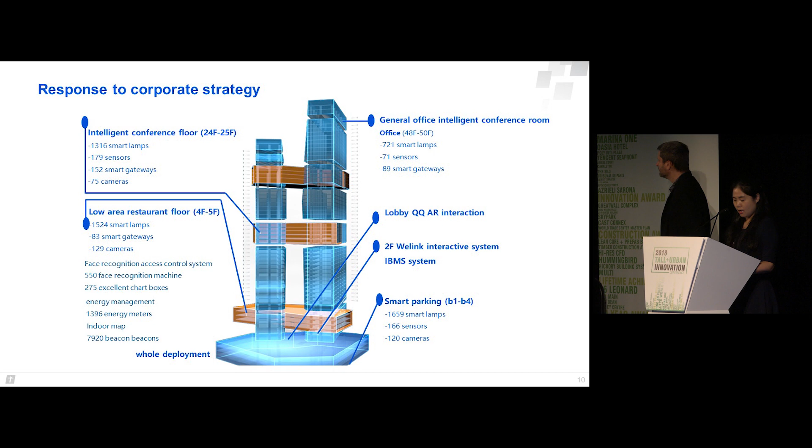At the same time, we set up a WeLink intelligence platform, which integrates all intelligent systems into one platform. This platform realizes the connection between people and things in the building, and carries on information exchange and communication between them, reflecting the strategy of connecting everything.

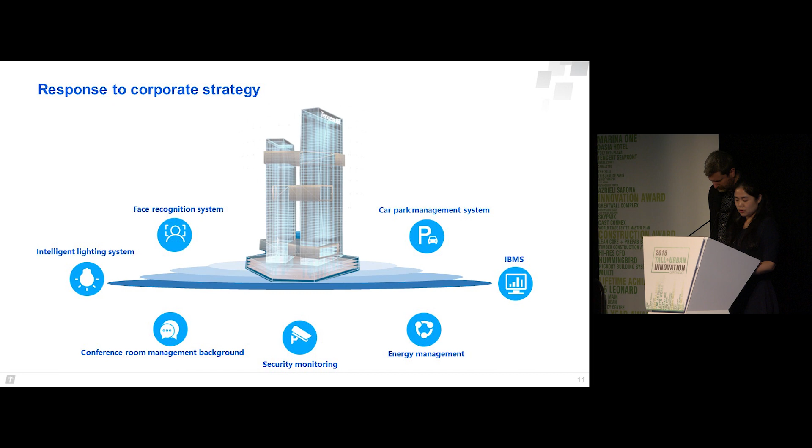On this platform, there are our company's major business lines of internet products, including QQ from SNG, YouTu face recognition technology, QQ TV, WeChat intelligence, MIG indoor precise positioning technology, QK certification, TEG security platform, and so on. The Seafront Tower provides a suitable application scenario for the company's products and has become the largest testing ground for our company's internet products.

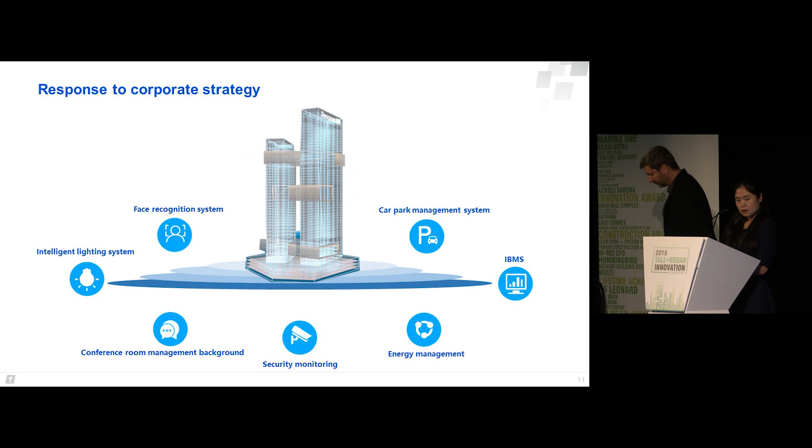Seafront Tower was produced in this context with the cultural characteristics of Tencent, with the logic of internet products, respect for users, respect for energy conservation and environmental protection, reflecting the progress of technology.

As you know, we have more than 39,000 staff when Seafront Tower was completed. We need more office space, and we will have lots of other projects under construction and to be built. These thoughts and visions will also be implemented in future projects.

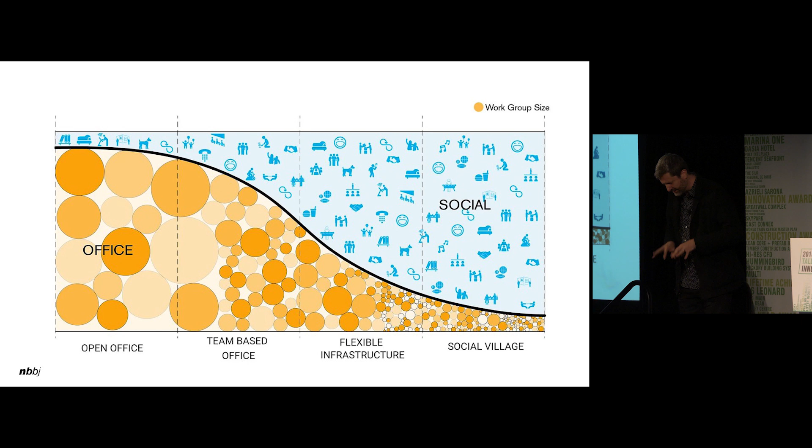This paradigm shift is at the base of all of this, thinking about connectivity. Jiang Ling talked about connectivity, connecting people, and we started very early on thinking about how to create a building that really truly connects people, which most tall buildings don't do a very good job at. We thought about where office and workplace is going. It's becoming much more social, less about people sitting in seats, typing and coding away. It's about getting people to connect and interact and create real meaningful innovation.

It's amazing to me how many companies still work on the left paradigm, which is head-scratching, while many of the more innovative companies are going more towards the right, which is a social, interactive, community-based work environment. So if we can create a building that actually does that, and explode typical building typologies to create that sort of interaction...

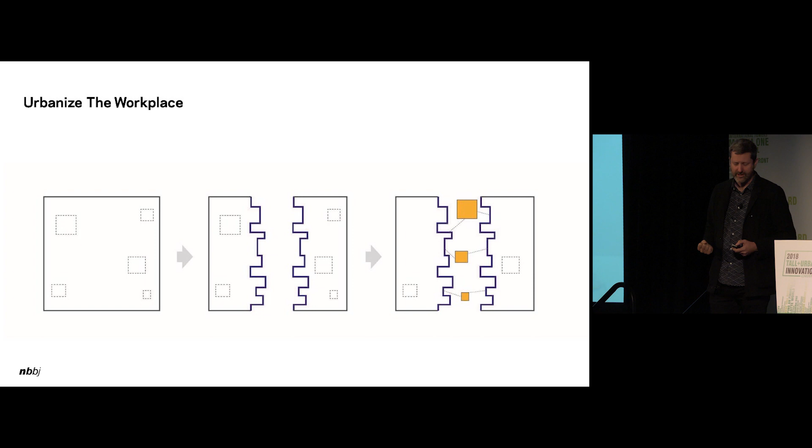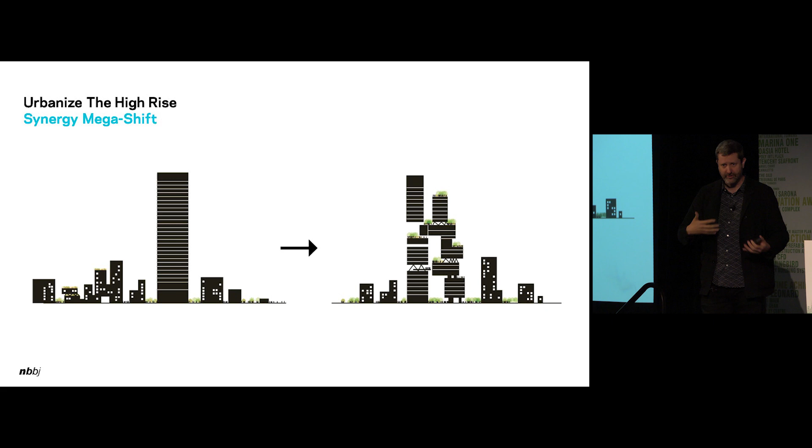Because the high-rise building is the prime culprit of non-interactive space, where nobody can see each other, nobody can connect with each other. That's a challenge everybody in this room faces: how to actually get people to interact and talk to one another. For a creative company like Tencent, to allow them to get the best out of their people, we have to explode these paradigms and move from the very pure economic form—a lot of people talk today about economics and economic-driven forms—to something more community-based, more green, more about people.

So that was really the underlying kind of thinking about this particular project.

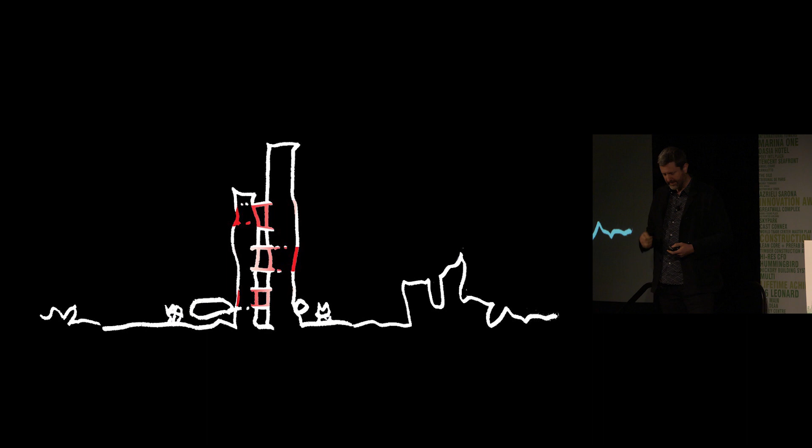So if we go deeper into it, we spent a lot of time, before we did anything, before we created this sketch, before we created the actual building, trying to understand what Tencent was all about. The building was really truly designed from the inside out, trying to understand their culture. Jiang Ling talked a lot about building the project from culture. So we spent many months in their offices, trying to understand what they're trying to do, where they're coming from, where they're going.

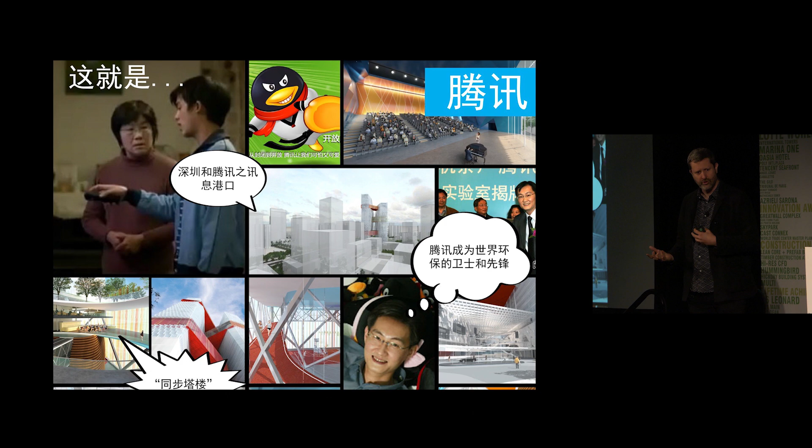And the sort of spirit, the character, the humor, the connectivity, bringing people together—what that all means, and capturing that somehow.

At the same time, understanding what their business is, which is one of the world's largest internet connectors. This talks about the cloud—it's the people that make that happen. It's bringing the people in the world together, and that became a very big inspiration.

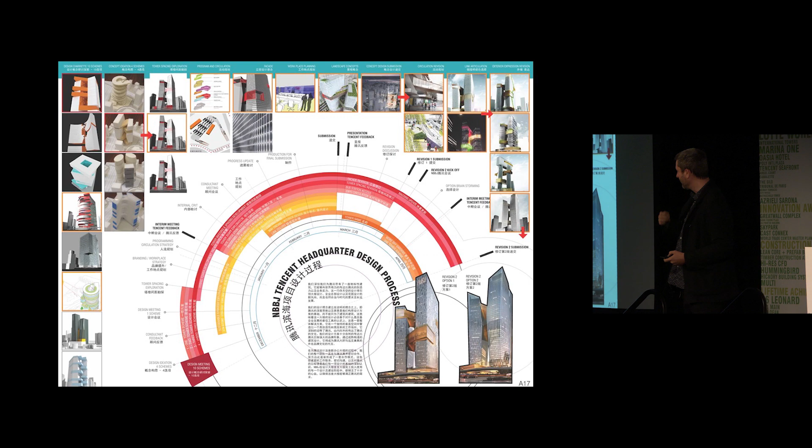We went through a very aggressive competition phase, with 2 phases, where we finally won the project ending up with this particular scheme, and I'll explain to you what this is all about.

But we started very early on—we had a sociologist on our team looking at what they're all about, how they work internally, and how they're then perceived in the marketplace, and how those connect.

And what we found oftentimes, it's kind of the same—it's the same people working there, same people using the product. That's expanded a lot in the past 9 years, but this is where we were at the beginning.

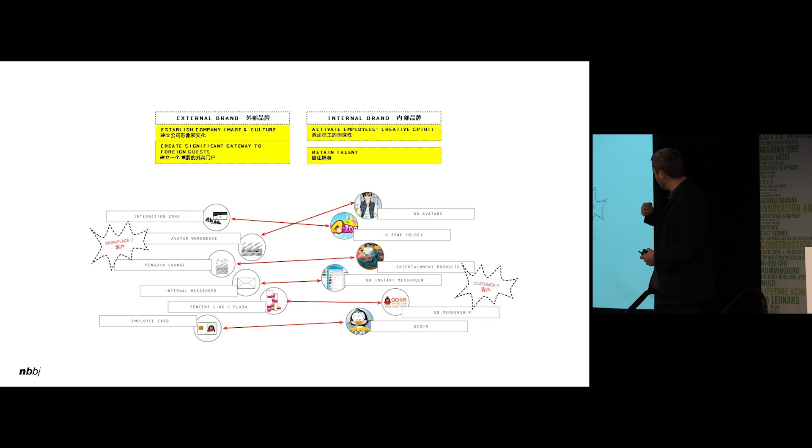So we started to look at creating spaces around understanding the product, understanding connection of people, and moving from there. That led to the idea that we could build the building on the left, which would be easy—a big giant tower with super efficient floor plates and everything at the bottom, avoiding lifting and egress issues. Really simple.

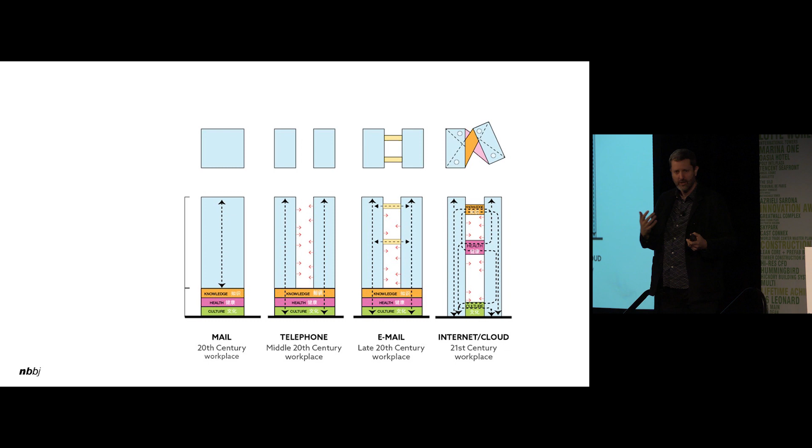But then if we pull it apart, suddenly you can see each other, and that's a really important thing. It was mentioned in the last presentation, the importance of actually visually connecting people in a tower. If we link it together, that's nice, so you have some way to move across. But we found often just a bridge link isn't very meaningful—nobody really uses it.

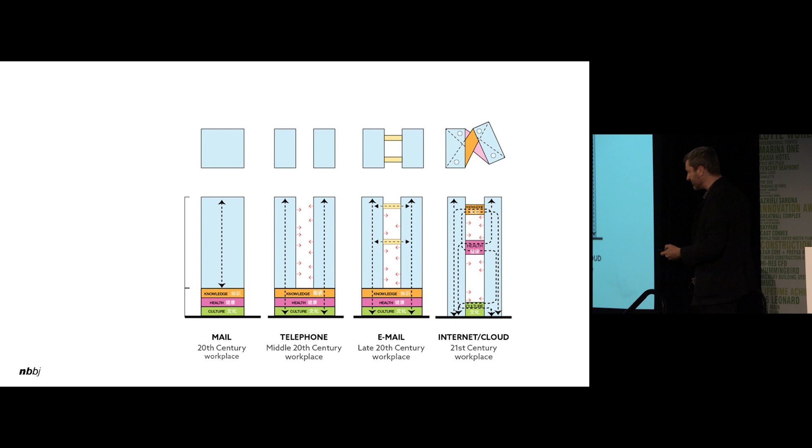So we took all the program from the podium and moved it up into the towers to create real meaningful connections between those towers. And that resulted in this idea of the vertical campus.

And I remember when we first went out to the site in Nanshan in Shenzhen—Shenzhen is the melting pot of China, an amazing city. They talked a lot about, wow, we would love to have a campus.

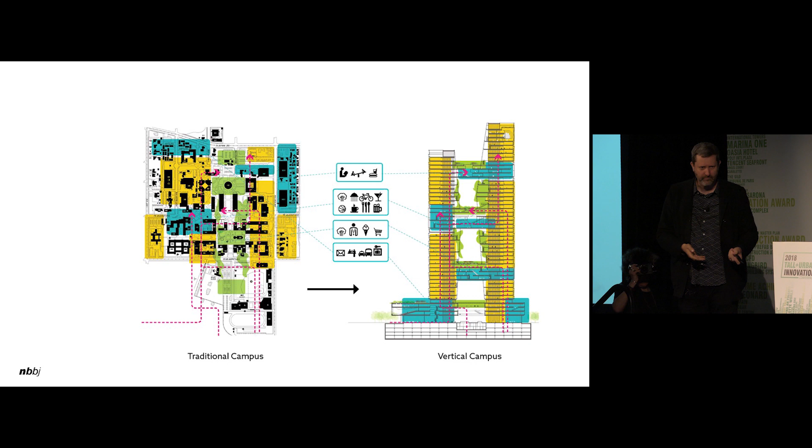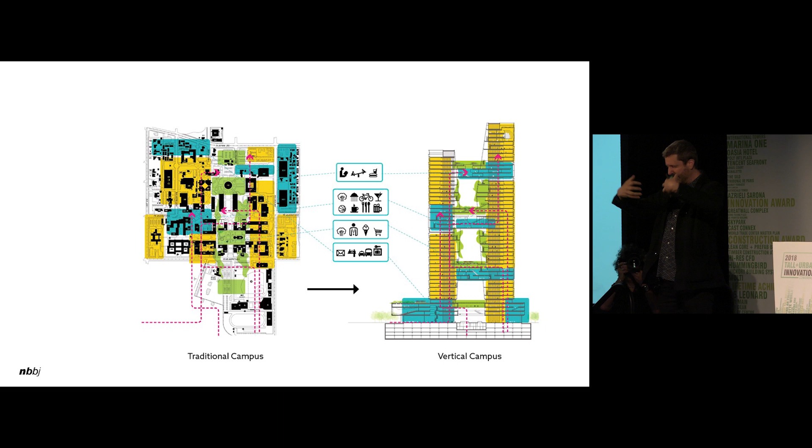Building a big sprawling campus in Shenzhen with the land prices there, of course, would be impossible with those costs, at least in this part of Nanshan, right by the university. So as we went through the process of understanding their culture, we ended up with this idea of the vertical campus, where we can explode the building typology to get something very marvelous and wonderful to happen inside the building.

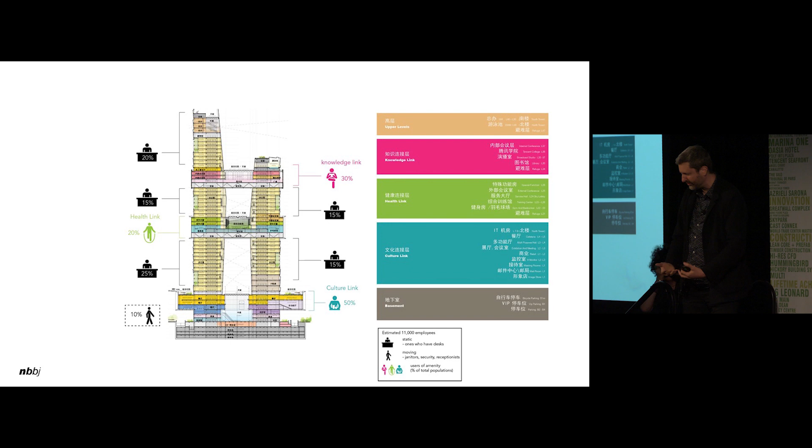And then the final location of pieces led to this thinking about these links. So the two towers, we split them into two towers so you can see each other. We've created three links, and they're all very meaningful. The bottom is a culture link, and that has a program which is semi-public, semi-private.

So there's things where you bring the public in, you bring them out, and you're linking the two towers together. We then created a health link in the heart of the building. The heart of the building is the health of your employees. So there's a basketball court, a running track that connects the two towers, there's food, nourishment, and meeting and connection spaces.

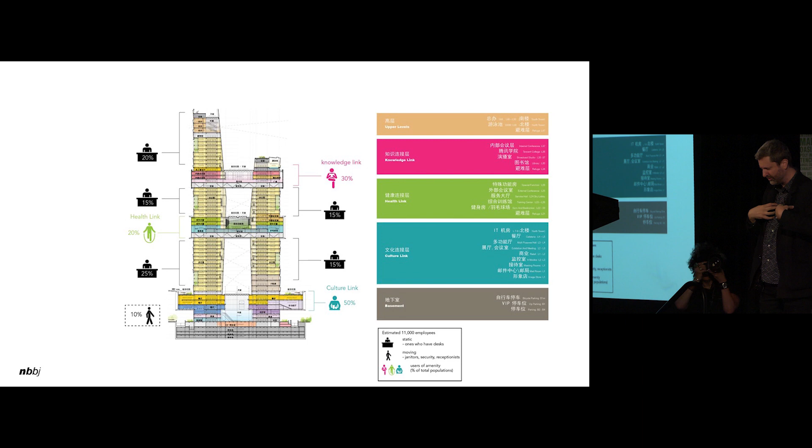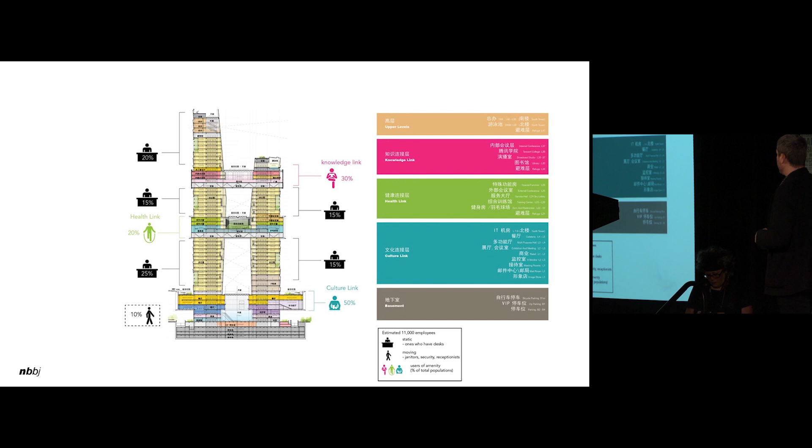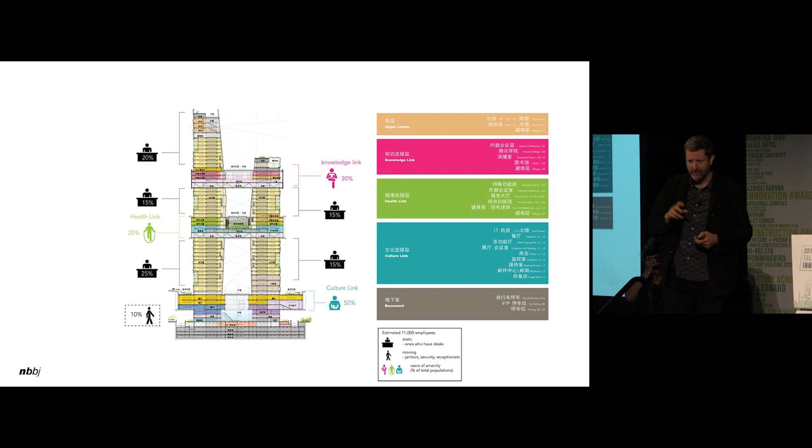And then the top is the knowledge link, which is the brain, where we have Tencent University, conferencing centers, and all those sorts of things. And that, in essence, creates this overall campus. We spent a lot of time trying to bring those nodes together so that those are, in a way, forced connection points, so people are forced to cross paths in those areas.

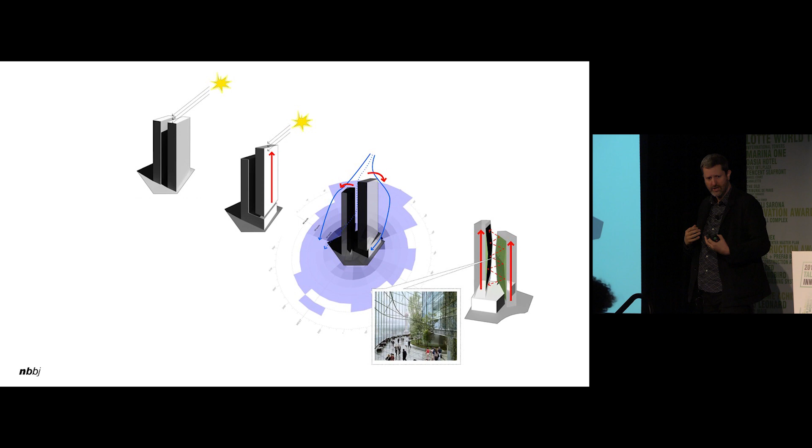At the same time, in splitting the towers, we very consciously lifted up the south tower, and made it quite a bit broader than the north tower for the simple effect of shading the north tower. So really doing very simple things with the massing to allow it to do more than just one thing, and allow the form of the building to come out from the inside of those links in that vertical campus.

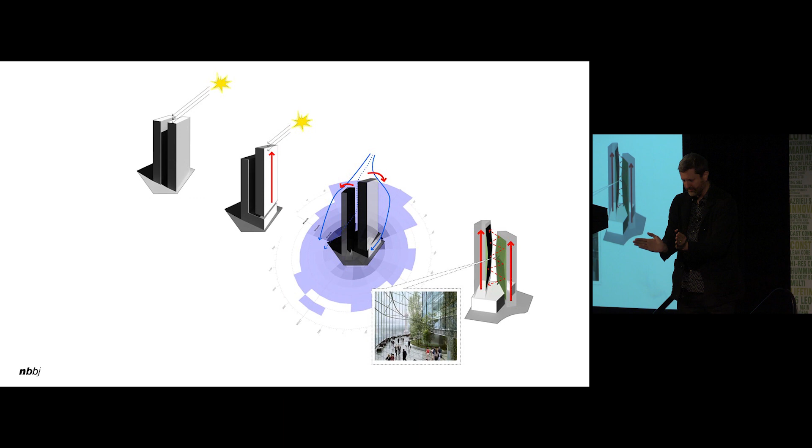And from the idea of shading in this very hot climate of Shenzhen, we then split it open to capture the prevailing winds and funnel them into the building in the center. You can see a quick site plan of how that cracks open on the site.

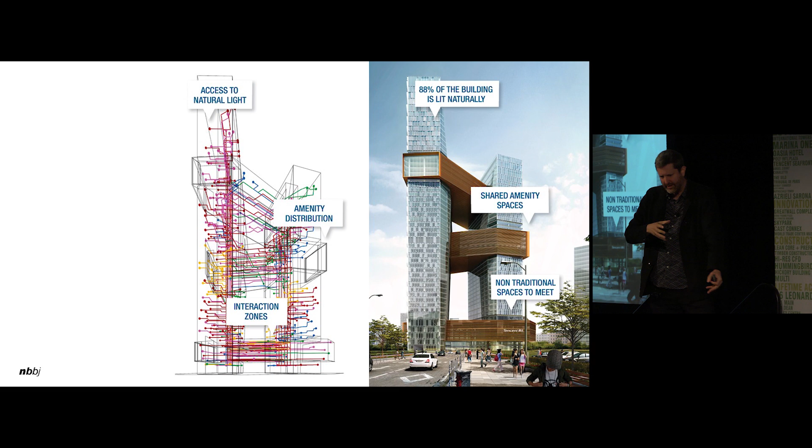We spent a lot of time working with Arup on the vertical transportation to figure out how we can get those links to be activated. So you have to go to them, you cross paths, you're going to grab a juice, you're going to go down, you're going to go up, and those become true centers and quads of the vertical campus.

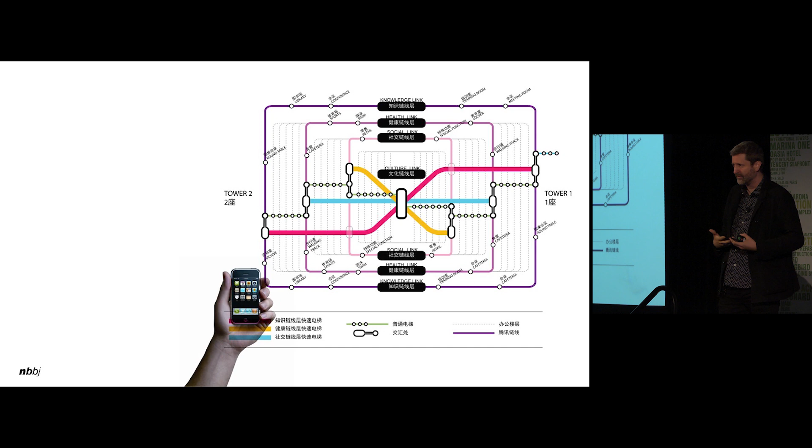And thinking about it like a transportation system—what's the transportation system for the high-rise of the future? What's the transportation for Tencent's headquarters was a lot of the conversation that we went through to get the right kind of movement flow to activate the building.

And it's interesting that it expresses itself in a way that's very strong, but it's also very connected in a way. It's very strong, but it's also very different. It's been broken open from the typology of the closed tower, suddenly broken open. It's embracing, it's welcoming. So it's, I think, a really important character that we tried to capture.

And we tried to create a softness to the building, even though it has these very strong forms and this strong character of connectivity, the skin itself becomes almost cloud-like as you go around it.

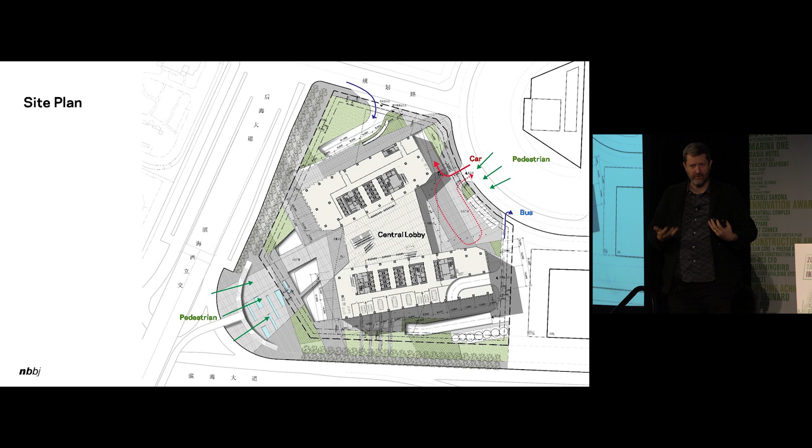A quick tour up through the building. Should note this interesting thing about the framework that we created: the strategy was that within the framework on the interiors, multiple firms then came in and worked on different parts of this campus. So the campus on the inside has different characteristics as you move through it, rather than a singular character—it has a very diverse, multiple character as you move through it.

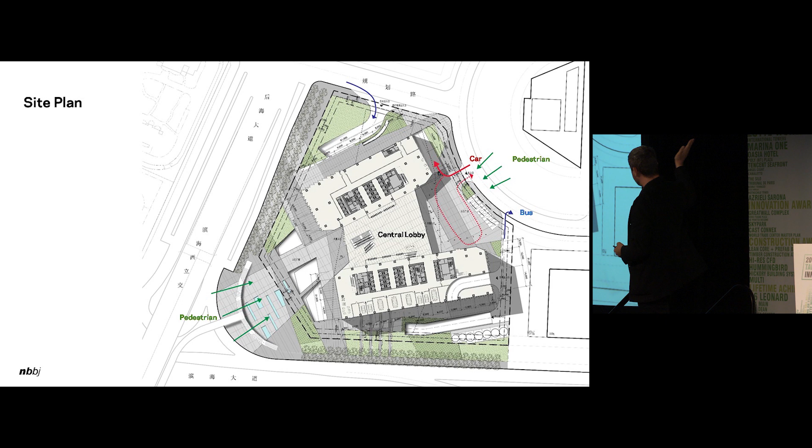As we move up into the culture link, that's the first bridge which links through and connects the two towers. There's a cantilevered auditorium on one side, and a canteen cafeteria on the other side. So this is a very high-flow center part of the whole vertical campus.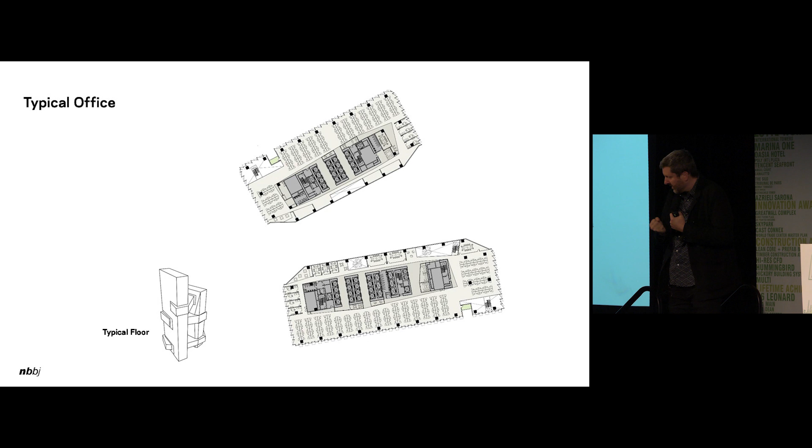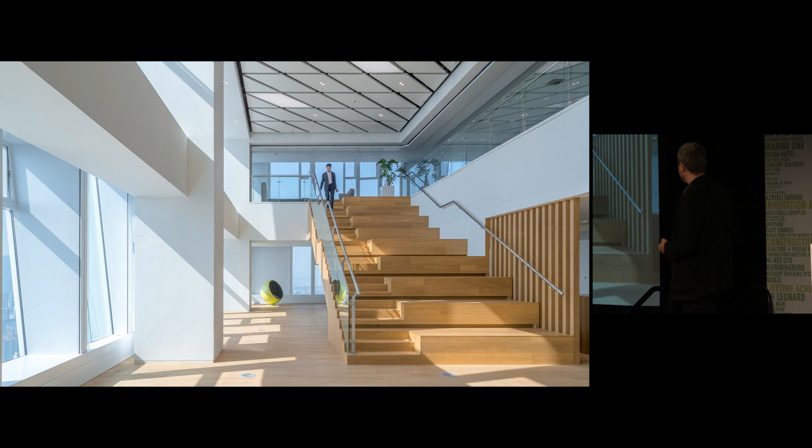The typical office is we try to create something very simple. We offset the core so that we have a very clean, open workspace, and then we have a more tight and dynamic space facing one another between the towers for conferencing and connections. The window wall itself then becomes a receiver for people to connect and to work together, becomes a room in a way inside the room. Each two floors are connected vertically as you move through the tower, again, to get people to move, get people to connect, get the flow of ideas going.

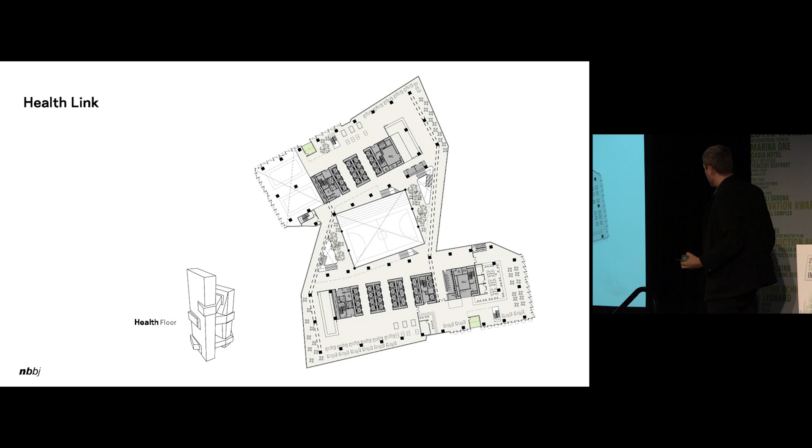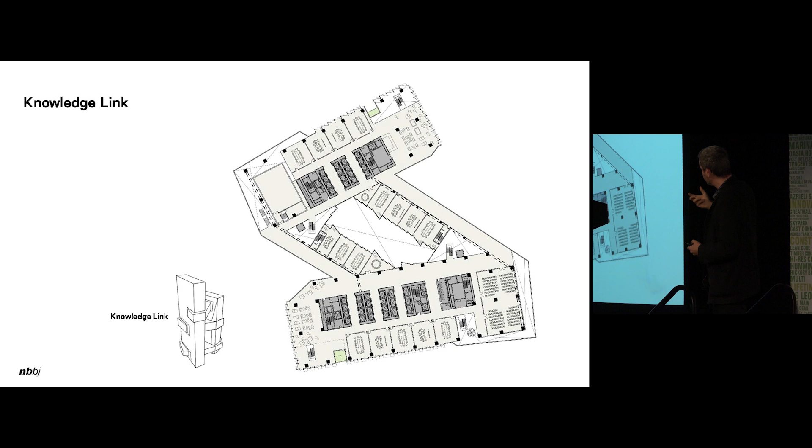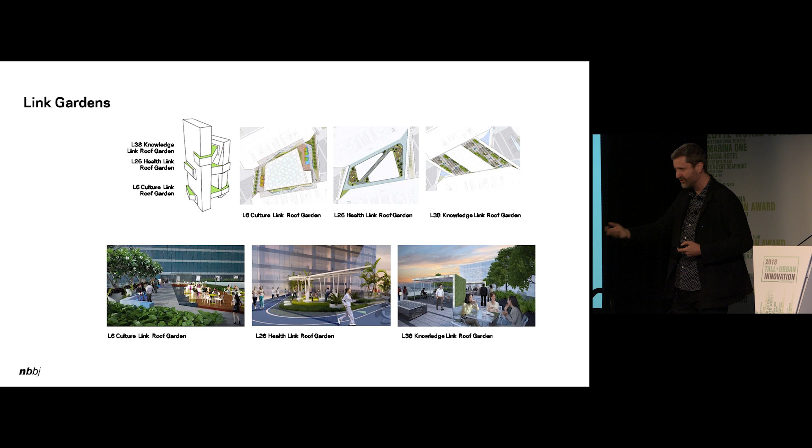And if we go up to the knowledge link, also has this sort of central space which links everybody together and allows you to view up into the rest of the tower. And on top of each one of those links are gardens. So back to the idea of green space, both from promoting innovation and connectivity to nature for the brain development, but also cooling the building as it sits in the city. A few of those spaces as you move up.

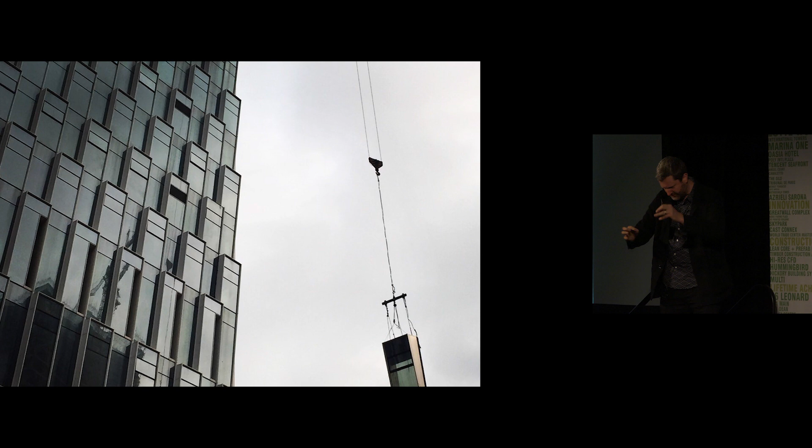And the last thing I want to talk about briefly was the facade. So this idea of this cloud, we originally had a model which had a whole bunch of pins in it, and it was this sort of cloudy, fuzzy thing on top of this very clean form. That stuck with us as the idea of creating somehow something soft, but that softness can do something useful.

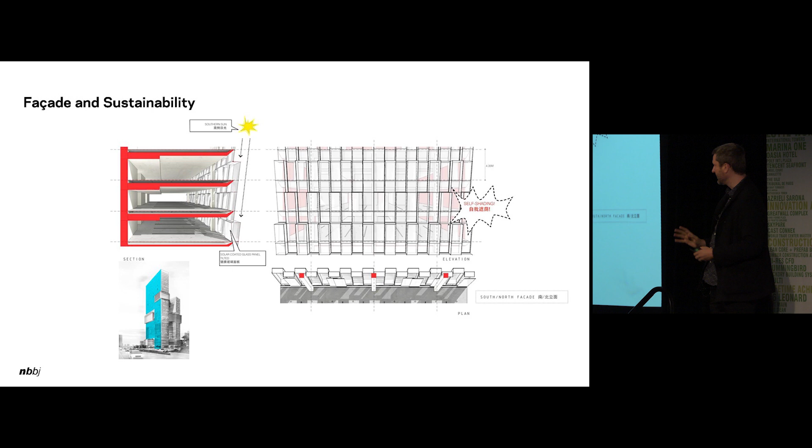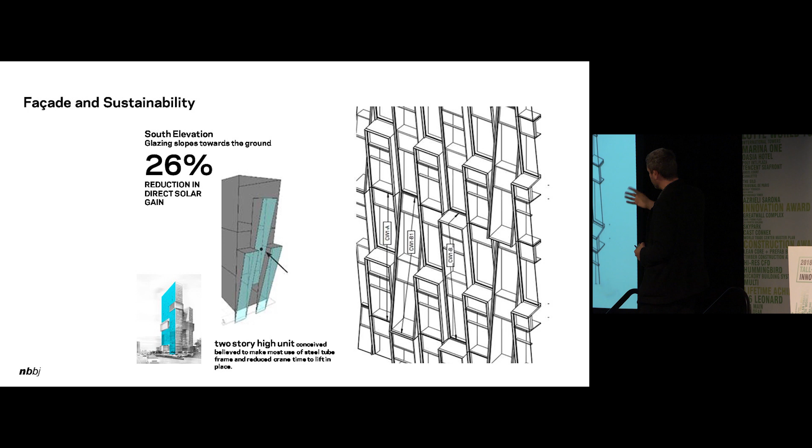So we thought, well, if the big tower on the south is shading the north tower, why not just let this cloud facade start to soften the energy loads? So we can lean out the south facade in these two-story pieces, which we worked closely with Thornton Tomasetti to develop the reality of this facade. And that then allows us to get about 26% energy saving just by using our computational model to get it just to be the right angle for the energy savings, but something that's cost effective at the same time.

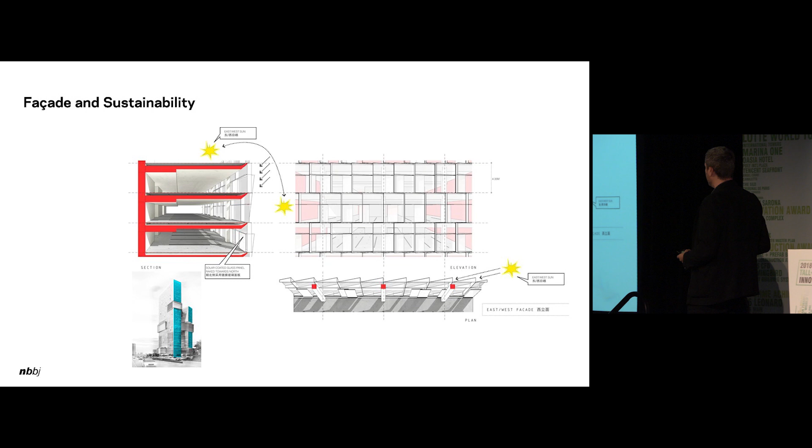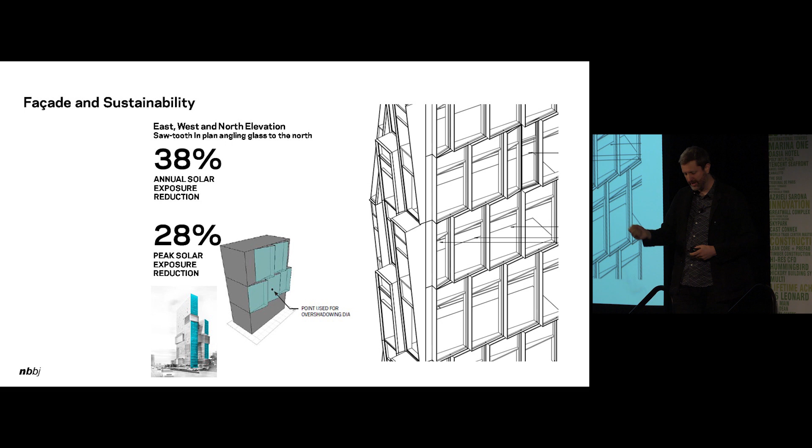And you can see how that starts to play out on that south facade in that sort of very unique textured form. East, west, and north, because in Shenzhen the sun will come around in the west to the north, we then shift all the planes of glass this way to reduce the heat gain. That gets us some pretty significant gains as well, annually reducing 38% of the solar input. So that's bringing it down significantly in overall energy costs.

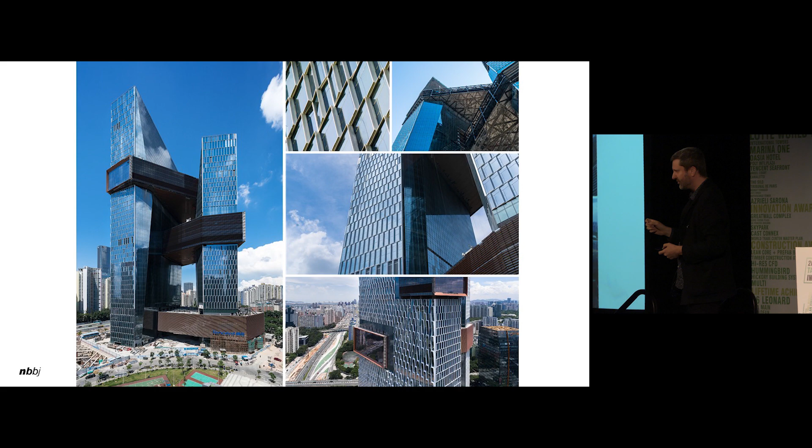And then the glass in between the towers is as sheer and as open and clear as possible to promote the connection between people. So each one of these moves was done very specifically, working with Tencent and TJA to create something that's very, very purposeful, and the form becomes very purposeful.

And as we move out to the city, we see a tower that is diverse, it's open, it's connected at the same time, in the midst of a sea of essentially boxes. So it's saying something very different about how to connect people, how Tencent is connecting people, and how a tower typology can then transform itself.